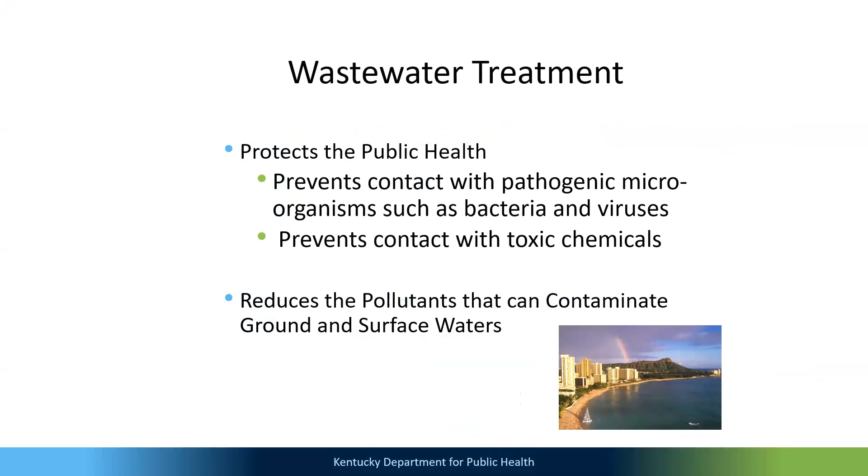Wastewater treatment protects the public health, prevents contact with pathogenic microorganisms such as bacteria and viruses, prevents contact with toxic chemicals, and reduces the pollutants that can contaminate ground and surface waters.

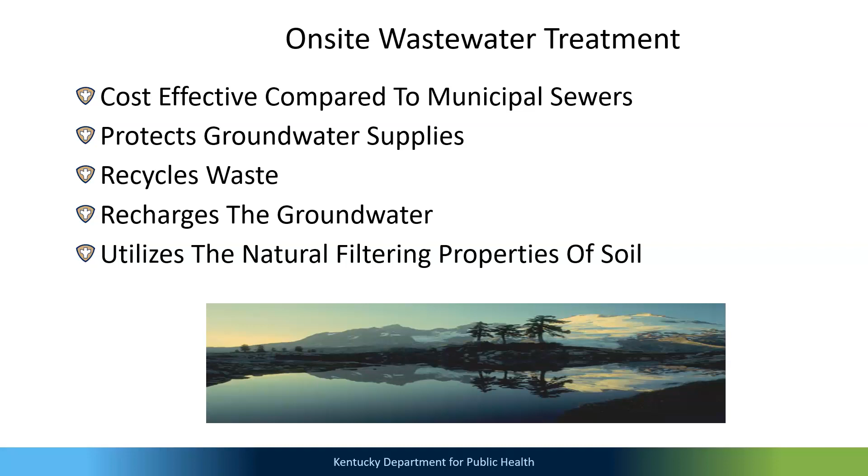On-site wastewater treatment is cost-effective compared to municipal sewers. It protects the groundwater, recycles waste, recharges the groundwater, and utilizes the natural filtering properties of the soil.

Soil consists of three types: sands, silts, and clays. The pores in between the soil are what actually absorb the water. The fluid flows through the soil pores, bacteria are filtered out, viruses are absorbed and destroyed, and chemicals are retained.

The treatment process starts with pre-treatment, or what we'd refer to as the septic tank. From the septic tank, the wastewater goes to the distribution box and then into the lateral field, where it absorbs into the soil. The soil does its natural cleaning, and then when it passes through what we refer to as a vertical separation, it's ready for the groundwater or the wells.

Each time a health department does a site evaluation, they go out and do a soil evaluation, and one of the things they're looking for is an 18-inch vertical separation, starting at the bottom of the trenches. That's what actually cleans the septic water and gets it ready for the groundwater.

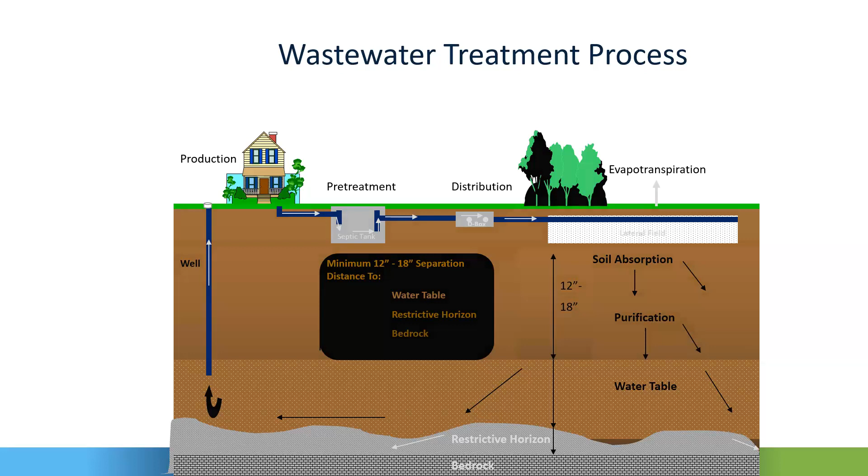Is it true that if you see a lot of cedar trees, the ground is probably good to start? No, actually if one of the visual indicators is a lot of cedar trees, it's probably real heavy clay, probably shallow bedrock, probably the opposite. That's misinformation, either that or my head.

The pre-treatment of the septic tank provides retention time of the wastewater. The system is designed so that when wastewater leaves the home and goes into the tank, that particular gallon of water is supposed to stay in there, say for 72 hours, before it goes on out to the lateral line. That's retention time to let it settle out and clear up as good as it can.

It allows separation of sludge and scum before discharge to the soil absorption system. It allows bacteria to digest solids anaerobically, producing partially clarified wastewater effluent for discharge to the soil absorption system. They have inlet baffles and tees that diffuse incoming wastewater and prevent scouring and resuspension of the solids.

It's kind of the way a septic tank is set up is this, where you see it says inlet tee and outlet tee, there's specific measurements that those have to be. On the inlet end of a tank, it's got to be 8 to 10 inches into the liquid depth. Now, what we refer to as the liquid depth would be from the bottom of the tank to the bottom of that outlet tee. That's as much water as it's supposed to be able to fill up. So that's the liquid depth, and the inlet tee has to be 8 to 10 inches into that.

And on the outlet, it's supposed to be 35 to 40% of the liquid depth. Now the thinking is the sludge layer, that's things settling, scum layer, stuff floats. That center area there where it says clear zone, that's the cleanest water that's in that tank. That's what is allowed to leave and go out to the lateral lines.

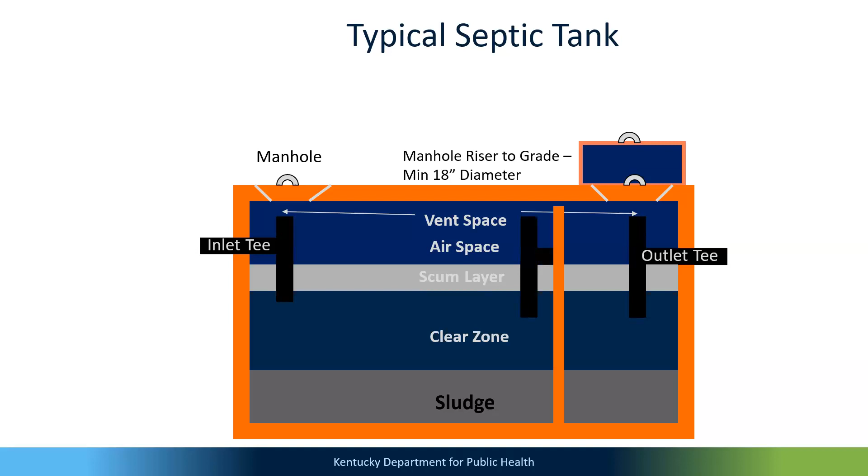That's just showing a 2-compartment tank.

Minimum septic tank requirements for a 3-bedroom or less, you got to have a 1,000-gallon tank. So even if somebody's putting a 1-bedroom rental cabin or a cabin in the woods or whatever, they're still going to be required to put a 1,000-gallon tank. And then each bedroom added past 3, you add an additional 250 gallons. Or if they've got a garbage disposal, you add another 250 gallons.

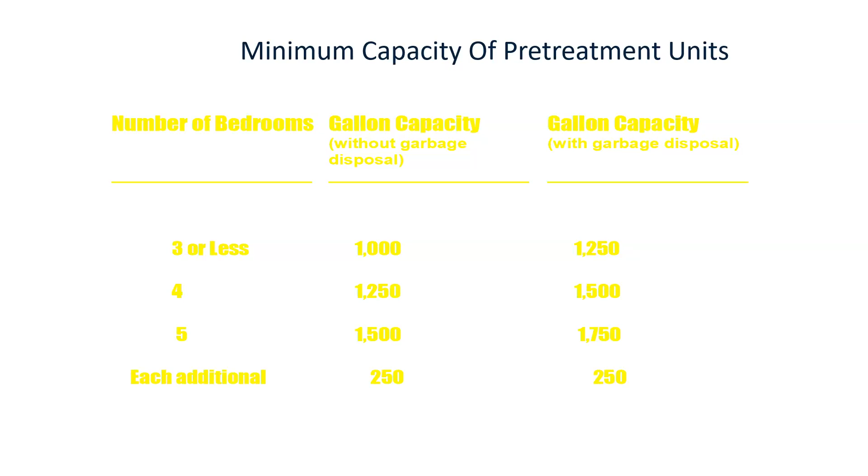The equal flow box, or the different types of distribution, one of them is the equal flow box. It's designed with a baffle. And when I say baffle, you see this - this inlet, this would be the inlet end of this distribution box, and that's the baffle right there. And what that does is actually when the wastewater comes out of the septic tank and comes into the distribution box, it slows it down.

And then it has to go down, and it comes up on this side because these are outlet holes here that actually are going to go out to the lateral lines. So it comes up slow and easy, and that way, that's why it's called an equal flow. However many lines you've got in that, the exact same amount of water goes out to each line.

And when you do an equal flow system, each line has to be the same length within 10%. You set them on a level, stable base, and we put inside those what we call speed levelers to actually adjust the water that leaves.

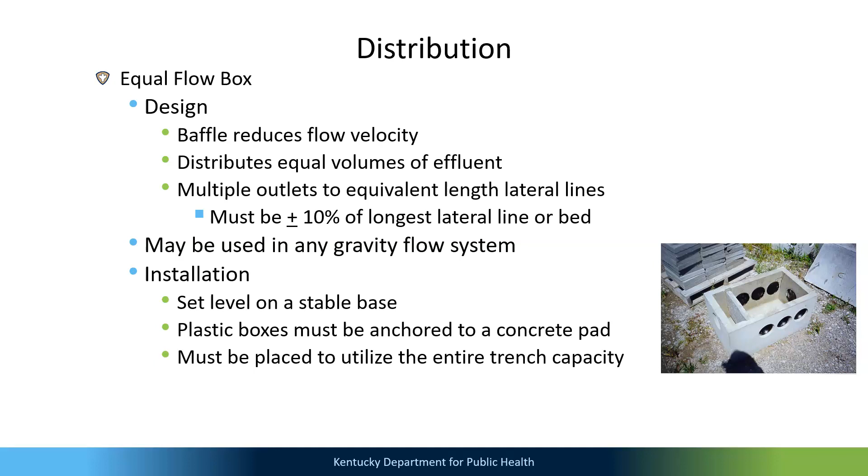Equal flow distribution, like I said, you can have several lines in that particular box. I think you could have 7, but if you needed more than 7, you could do multiple equal flow boxes for really large systems. You can get those boxes equal flow with just 3 outlets, 4 outlets, 5, 6, or 7. That's usually the way they come.

But that's kind of hard to tell on that picture. Those lines don't run downhill, they're actually level. They're running on contour. So if you took a grade shot at the end of this line right here, it's going to give you the same grade shot all the way.

So you got to run them around the contour the way the ground lays, but they got to be level. Now they don't have to be level like each one of them this way - they just got to be level within their own line. So if you're on a hill slope, this row's got to be level, and then the next row's got to be level within itself, or whatever.

Okay. Is there a volume? Is there a volume on this thing?

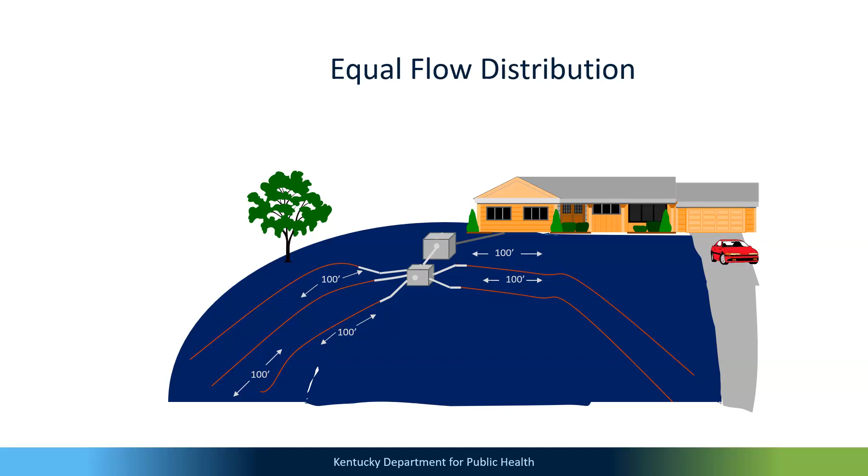I must have just had them turned off somewhere, or turned down the volume. I thought I had it great. Well, you could probably just turn it off on the TV. I don't know how loud it was down there, but up here it was loud.

Okay, equal flow placement. Notice as the lines come out of that box and go over into the trench or lateral line, you're supposed to go into the trench with a minimum of 2 feet of solid pipe, then change over to your lateral line with a hose that distributes it out. If you're using a rock trench or rock bed...

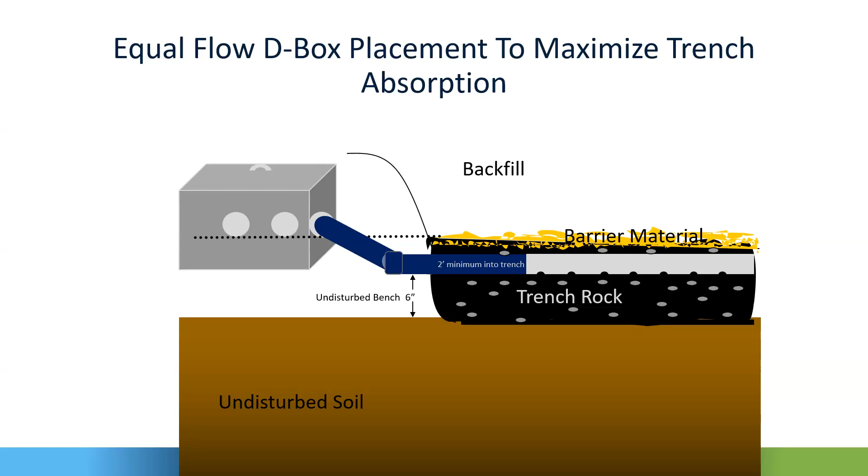The placement of the height of the box from the outlet is important, because if you get it too low, it won't back up into the box. It may pop out of the ground.

There's the speed levelers I mentioned, and sometimes after that has to be checked initially when you put the system in and it gets inspected. Later on, for a failing system, you can take that lid off, and there may be an issue, so you just take a shovel and turn those levelers around and readjust that to get it going back to equal flow.

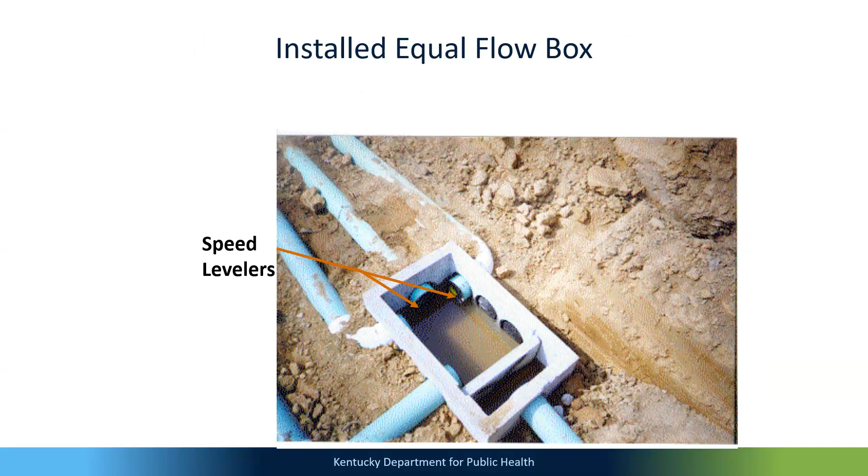A hillside box system usually has 3 outlets. The bottom of the inlet is at least 1 inch above the tops of the lateral line outlets. The bottom of the overflow outlet is level with the tops of the lateral lines. Each successive trench is filled before overflowing to the next box and trench, resulting in continuous flooding of the upper lines.

So like I said earlier on the equal flow system, all lines get the same amount. On that equal flow system, if you put 5 gallons of water in that distribution box and you've got 5 lines, they're each going to get a gallon of water all at the same time.

Well, a hillside box or hillside system works differently. They don't have to be equal lines. You can have, for instance, 100 feet running this way and 25 feet running this way. But these upper lines on the first box are going to completely fill up and actually back up into that box, then spill over the hill to the next box. They're good systems and they're used in some parts of the state.

I'm not a big fan, but they have their place. They absolutely have their place because there are some slopes and the way lots are laid out on hillsides where you can't get a flow system. But the only thing is, if these upper lines fail, the soil pores stop up and it gets all the way down to the bottom, however many tiers of land you have. Once those fail down there and come up, the system's pretty well shot.

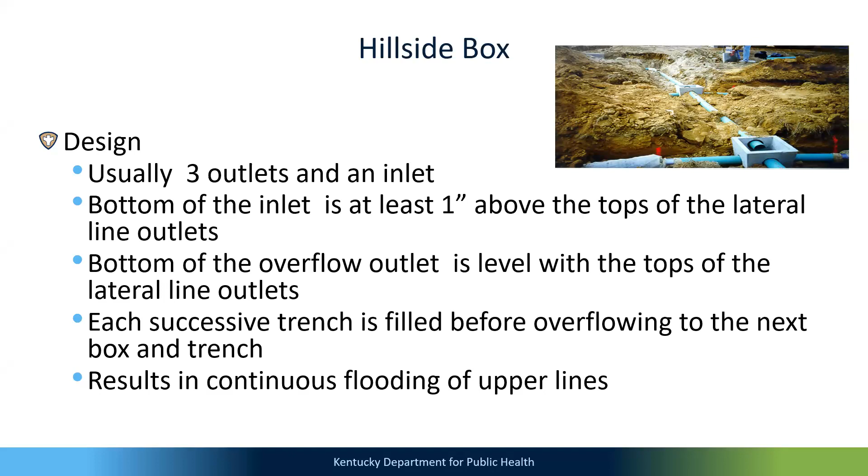So as you can see on the inlet, water flow comes in either from the septic tank or another hillside box above it, where this one's at. Then it fills up and goes to the outlet lines. Once those outlet lines fill up, the water will back up. Notice where this overflow is lower than the inlet, but higher than this, so it flows through this one down to the next hillside box.

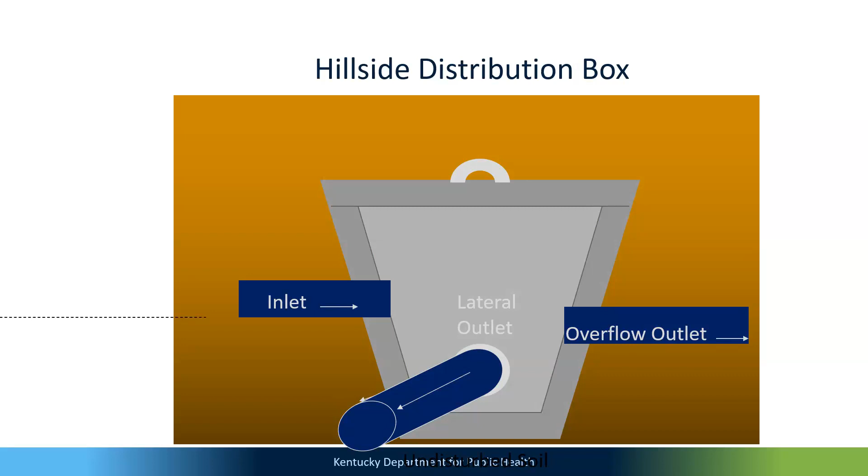Notice the difference in the lengths of the rows coming out. You can have different lengths, so you can pretty well suit the system to the lot according to the slope and how much room you've got.

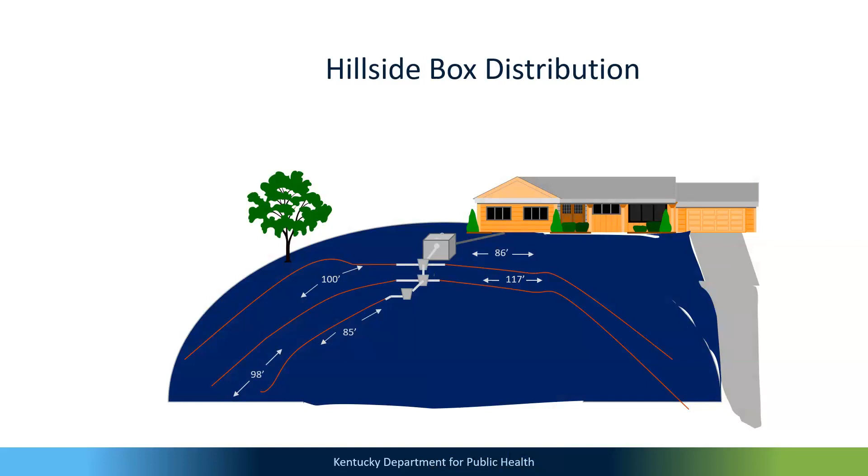Okay, hillside box use and installation. They may be used on hillsides. They may not be used in sites with group 4 soils. They don't require equivalent length lateral lines, and you install them level on a stable base.

Earlier when I mentioned the soils, all soils are either sand, silt, clay, or a mixture of sand, silt, and clay. When we do site evaluations, we decide whether that system gets installed in a group 1, 2, 3, or 4 soil, and that determines how large the system is and what components get put in.

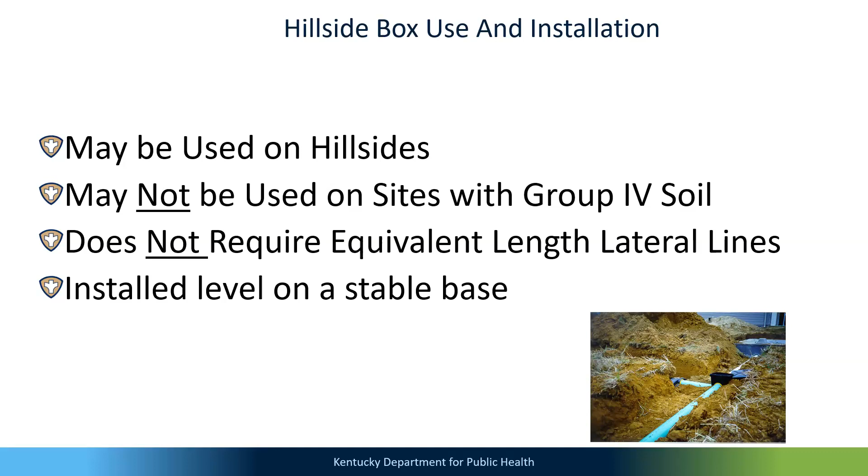Naturally, group 4 soils are heavier clay soils, and you've got to have more lateral line. Not that clay soil isn't excellent for actually cleaning up septic water, but it takes longer because the soil pores are so small, and you've got to have more storage room. So you need more lateral lines to hold it while it's soaking into the ground.

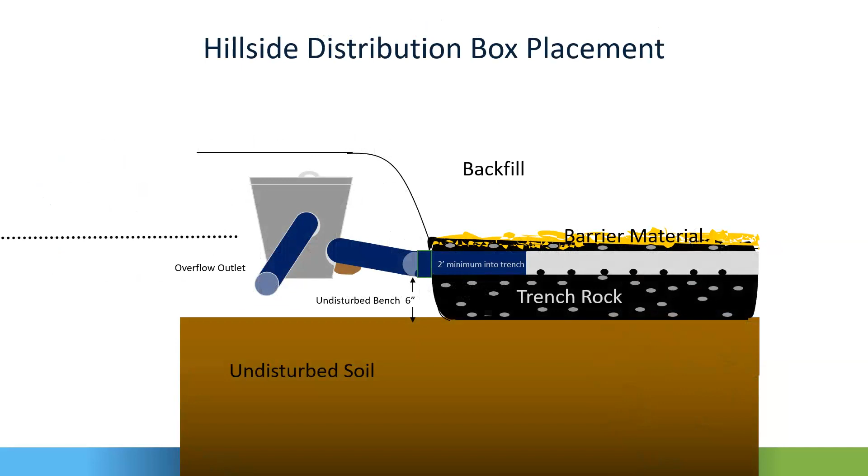The placement of the box shows how high or low it is, because if you put it too high, it may pop out of the ground before it backs up into the box. If you place it too low, that whole lateral line it's feeding may not completely be full.

These lateral lines, if we're talking about conventional rock trenches, that's the way every system gets sized originally on a 2-foot gravel trench. Then we do calculations and go from there. We'll go to either a chamber system, a rock bed system, or a chamber bed system. But the actual conventional rock trench is 2 foot wide, 12 inches of rock deep, and however many linear feet you have.

So if the box is too high, if that trench gets full of water, it may pop out of the ground and you're going to see a failure. If it's too low, it's going back into the box and spilling on over the hill before the whole 12 inches of the trench was actually full. So proper placement is really important in a hillside system.

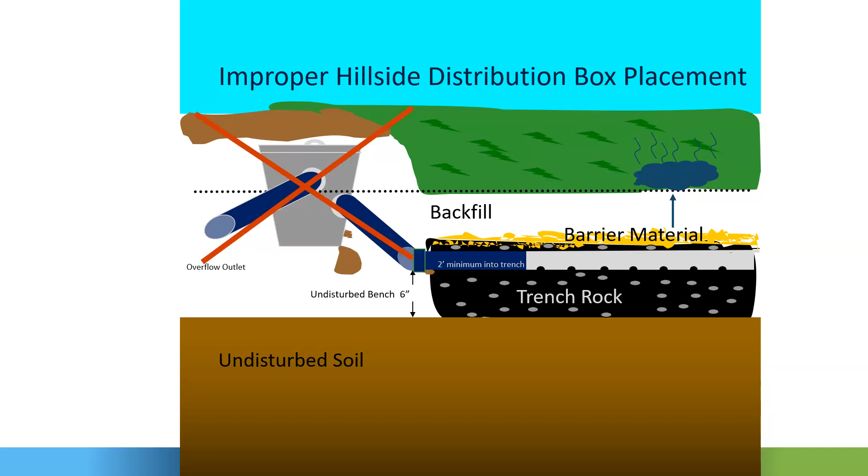The piping, non-perforated piping for gravity flow, is used for carrying effluent between the septic tanks in a series, between pretreatment units and distribution boxes, and it must extend 2 feet into the lateral trenches. We identify this as solid piping. It's in the component regs, with ASTM numbers and specifications. We can use SDR 35 and schedule 40 for septic systems, and there's another number or two we can use for some lateral lines.

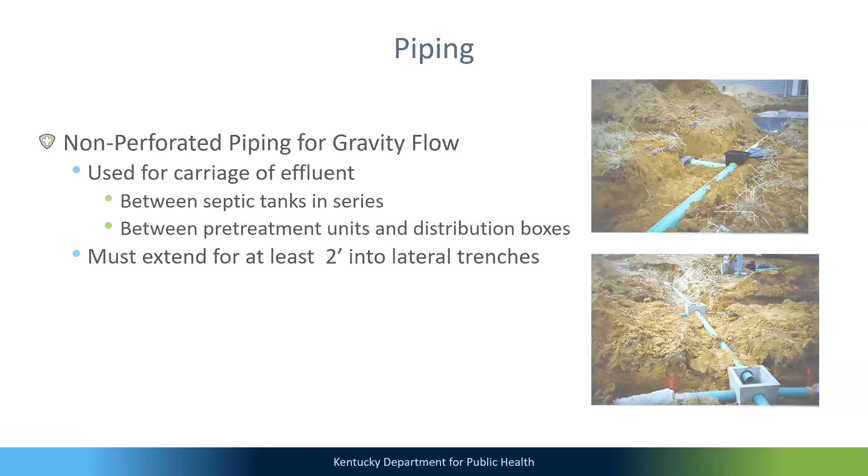Okay, leaching chambers. I don't know if everybody knows what a leaching chamber is. Those are the big black plastic things, kind of dome shaped, coming in 4 or 5 foot sections that you snap together. We've got a picture of them here in a minute. People tend to use them because they save some space on linear footage. Sometimes on small areas where you don't have room for a conventional gravel trench system, you may be able to get a chamber system in, or a chamber bed system.

They have to support 600 pounds per square foot on top. They must provide sidewall openings. They must be interlocking, provided with end plates, provided with inspection ports, and marked with the manufacturer's name and an assigned serial number.

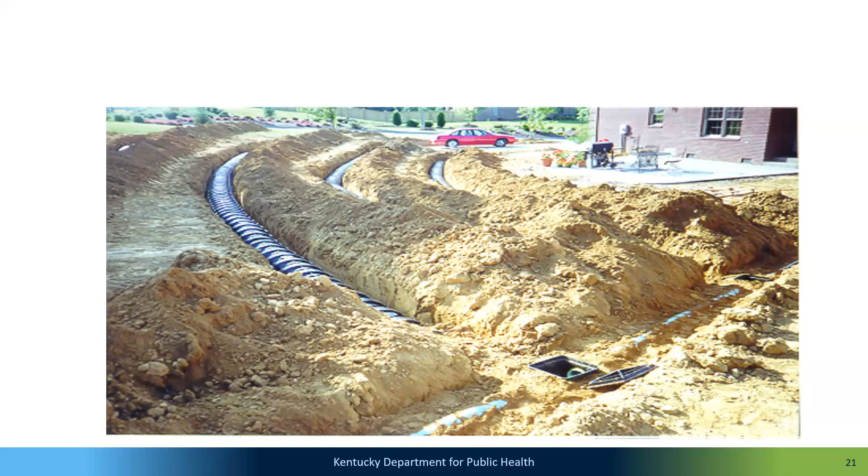And that appears to be a hillside drop system, because I'm seeing multiple boxes there. I don't know exactly where that picture came from, so... that's actually a leaching chamber bed.

Those chambers come in a single row - the single one is 3 foot wide, so we consider that a single row. But anything wider than 3 foot in chambers, we consider a bed. Those chambers come in 3 foot, 2 foot, and 1 foot widths. So you can have a 3 foot single row, or a bed anywhere from 4 foot up to 12. Regulations stop us at 12 feet - that's as wide as a bed can be, whether it's a chamber bed or a gravel bed.

Now for linear length, we can go up to 200 feet. The thing is, most people don't have room for a 200 foot consecutive single row - it's got to be broken up. And I'm personally a fan of more rows with shorter lengths. They seem to work better.

Probably 20 years ago, if you'd asked me, I'd have said - and I'm not trying to knock leaching chambers, they have their place, they're a real good product - but I was really high on them. But over the years, a good gravel bed, good 4 or 6 foot gravel bed is a hard system to beat. They're just really, you don't have to worry about people tearing them up. They're just a hard system to beat.

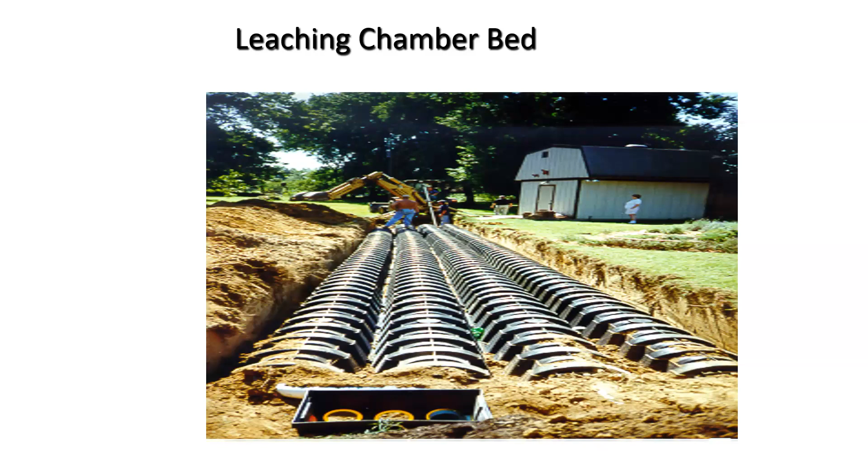You'll tend to see more chambers installed in counties that don't have rock quarries right in the same county. If the guys have to truck the rock from a county or two away, the price goes up, so they may use chambers. On the other side, you'll see more gravel beds or conventional lateral trench in counties where rock is easily available.

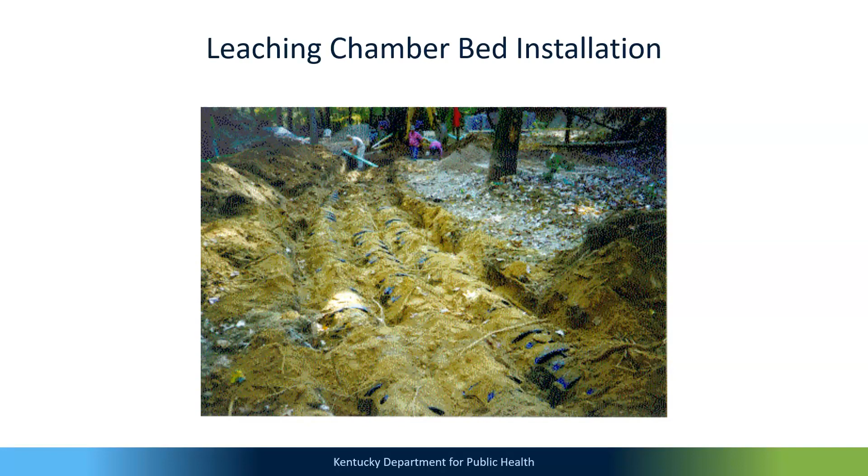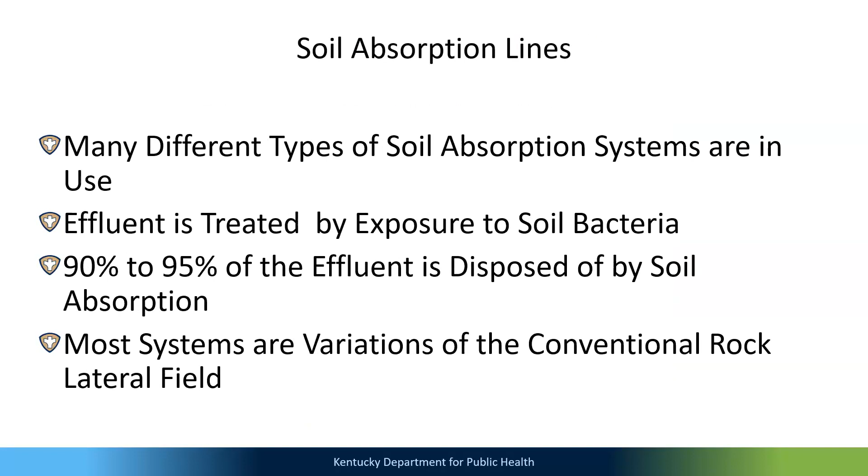Soil absorption lines - many different types of absorption systems are in use. Effluent is treated by exposure to soil bacteria. 90 to 95% of the effluent is disposed of by soil absorption. Most systems are variations of conventional rock lateral field.

The design of the conventional rock: maximum 200 feet in length, 2 foot wide, spaced 8 feet from center to center. That means if you've got multiple rows, they have to be 8 feet from the center of the rock on the first row - the next row has to be a minimum of 8 feet. That actually gets you 6 feet of solid ground in between if you go 8 feet center to center.

The maximum depth - and when I say maximum depth, we're referring to the bottom of the trench, where the gravel is put in, where the gravel meets the soil - that's 24 inches, and that's the maximum. The thinking is, if it's any more than that, there's not going to be enough air in the soil to give the wastewater proper treatment. So a high percentage of systems have to be put in less than 24 inches.

Because I mentioned earlier that we're looking for 18 inches underneath the bottom of that trench - if you go 24 inches deep for the bottom of the trench, we're needing 18 inches of good usable soil. When you add that up, that's 42 inches. That's what a health department, when they come out to do a site evaluation, is going to want to look at - 42 inches of soil. Now, if they hit some kind of restriction, like massive soil or rock before that 42, that's all they're going to get to use.

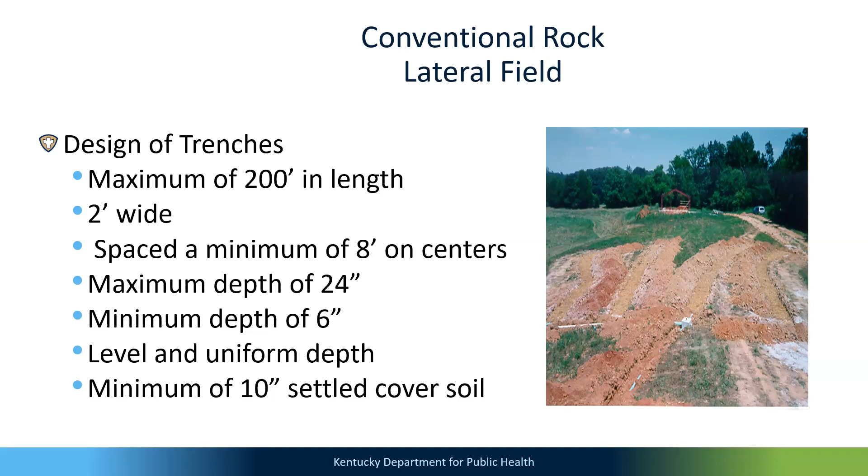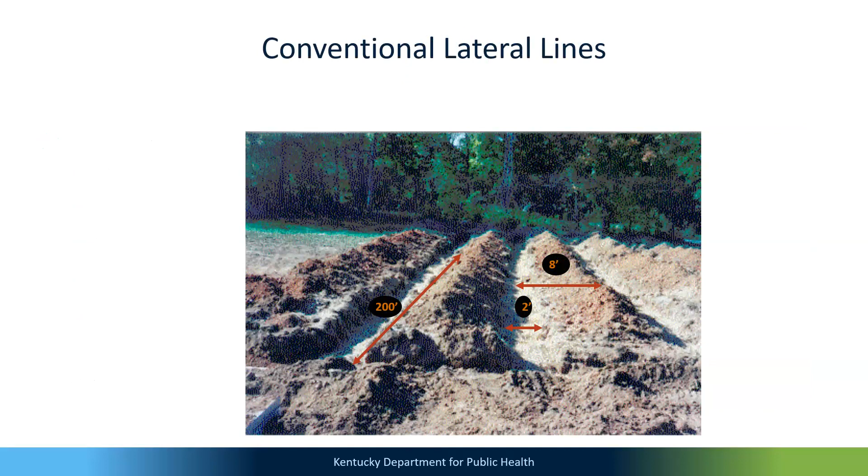That's just showing the 2 foot wide, 200 feet long, 8 feet center to center. That's showing the cross section of a lateral line. In this area here, that's 12 inches of gravel that's 24 inches wide. When these are installed, you lay down 6 inches of gravel, put your 4-inch perforated pipe on it, then put another 2 inches of gravel for a total of 12. So that pipe in the lateral line is going to be 2 inches underneath the top of the gravel. When the water comes from the distribution box into that pipe, it distributes it out into the gravel. That wastewater goes into the gravel, gets some treatment there, then starts soaking into the soil. As it filters through the soil, that's where it gets clean, ready for the groundwater.

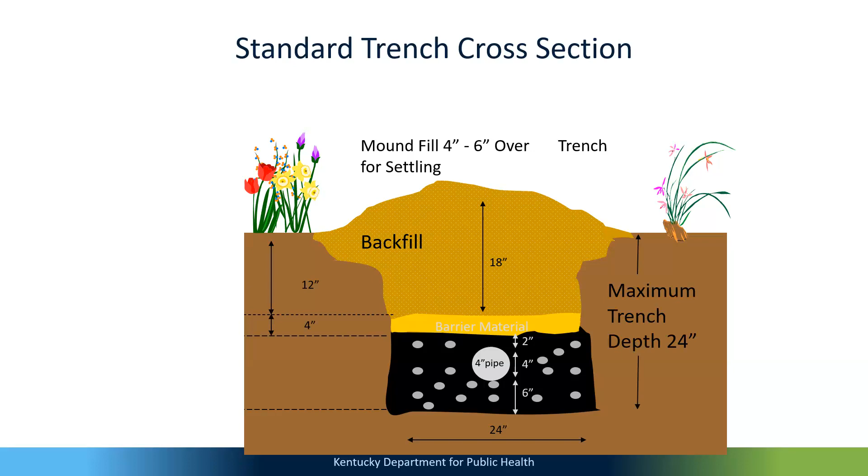That's showing that when the lines are covered over, it's good to heap them up a little bit, because if you don't, and you try to fix that dressing out right when it's done, a homeowner in a month or a few weeks will have trenches and valleys in their yard. So it's better to have it heaped up a little, since if it don't settle down, they can always drag it around a little.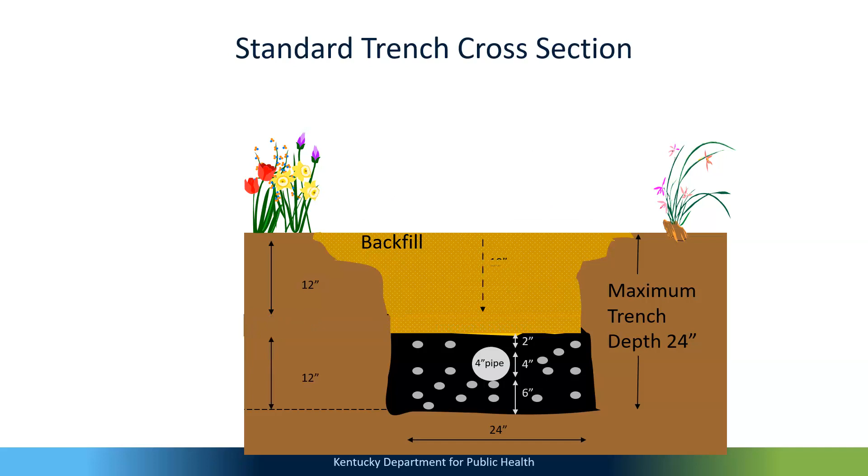That's just basically talking about the same thing I was talking about there.

The pipe coming from the distribution box actually needs to go into ground that's not loose. When this is buried, the trench going over to the lateral line just needs to be buried enough for it to set on solid ground. This needs to be undisturbed here.

And then of course that 18-inch vertical separation distance, that is the key to a septic system getting the water clean. You hear people talk about wanting a green system, and companies claim to have the greenest, newest, best thing there is. But there is no greener septic system than a regular traditional system, because what's more natural than the soil, through natural properties, cleaning the wastewater and getting it ready for the groundwater. There is nothing more natural than that.

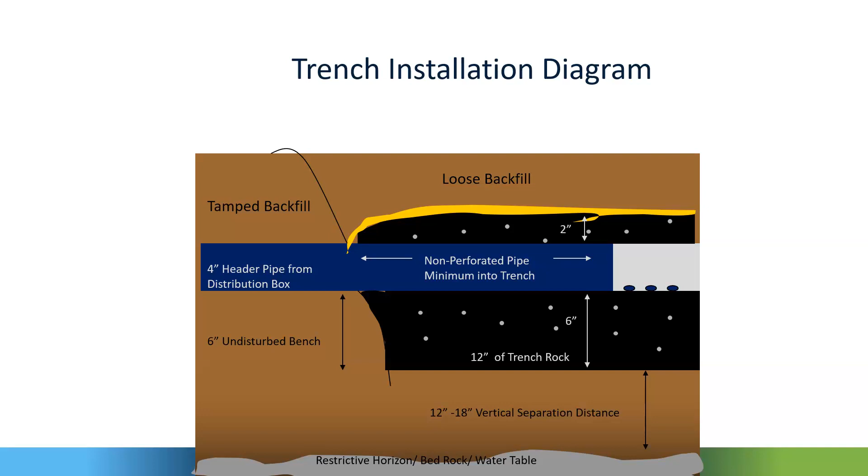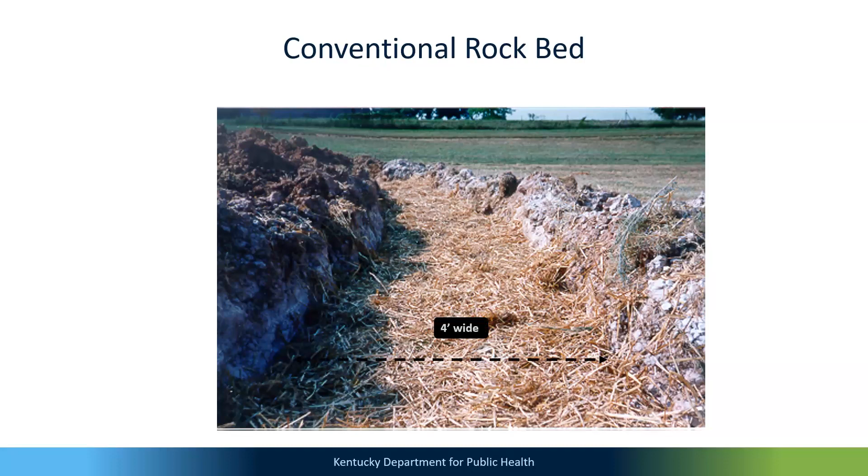Using that old bucket auger, you do a lot of guessing. Sometimes health departments will have to tell the homeowner, well, I may have to turn this site down, or it may not be as bad as I'm seeing with this auger, but if you get me some pits out here, we'll take a look at it. And if a health department goes to a site that's been altered in any way, then the regulation goes back.

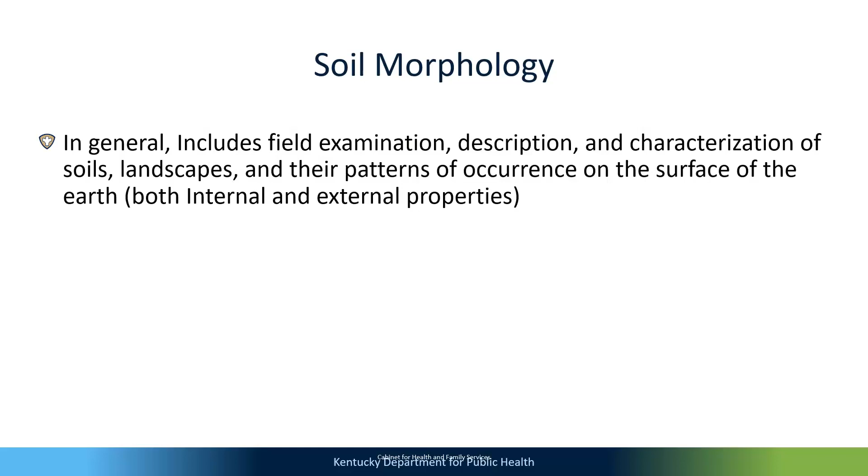Soil morphology in general includes field examination, description, and characterization of soils, landscapes, and their patterns of occurrence on the surface of the earth, both internal and external properties.

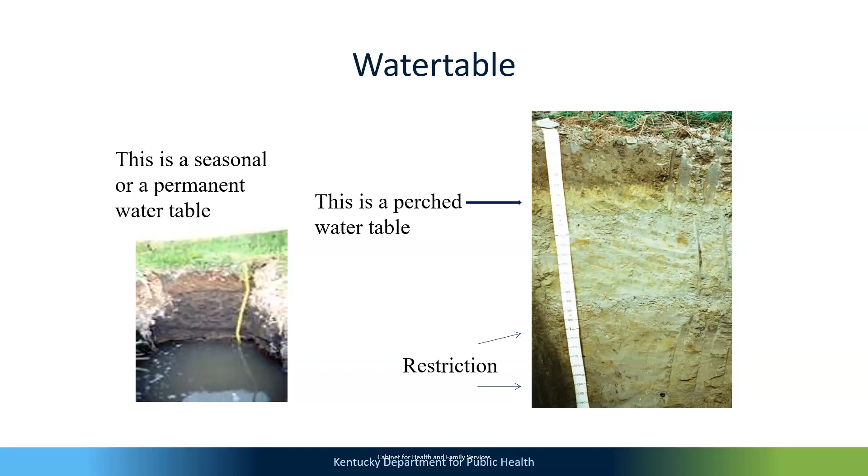Water tables, we've got an example of a seasonal or permanent water table. There are things we look at and identify to know there's a perched water table, and soil indicators called mottling of the soil. That's something health department inspectors look at during the site evaluation, and it determines the components that go in a homeowner's system, and whether or not they have to have what we refer to as a curtain drain, or can stay off of that. There's a lot of different things to that.

Hard pan is usually a clay-rich layer of soil in which soil particles are cemented together with silica, iron oxide, calcium carbonate. Hard pans do not soften when exposed to water. You can't put a septic system on a hard pan or in massive clay soil. If you do, it's going to fail. Once your lateral lines fill up, the water has nowhere to go. It's going to back up or pop out on top of the ground.

One thing when we talk about a failing system, I've heard it said often: people say, well, my system's been in for 40 years and I ain't never had a bit of trouble. Well, they probably haven't, because in their mind they're not seeing anything coming on top of the ground. But it's untelling how deep it was going, it may not be getting any treatment, it's getting into the groundwater. Well, that's a failure, but that's not a failure that they're having to look at.

That's the one with the health department inspector's job. That's one of the hardest things to do, is try to make a homeowner understand why they're having to do A, B, and C to put a septic system. It's not because that inspector's mad at them that day. It's just that's the way it is, because of the soil conditions.

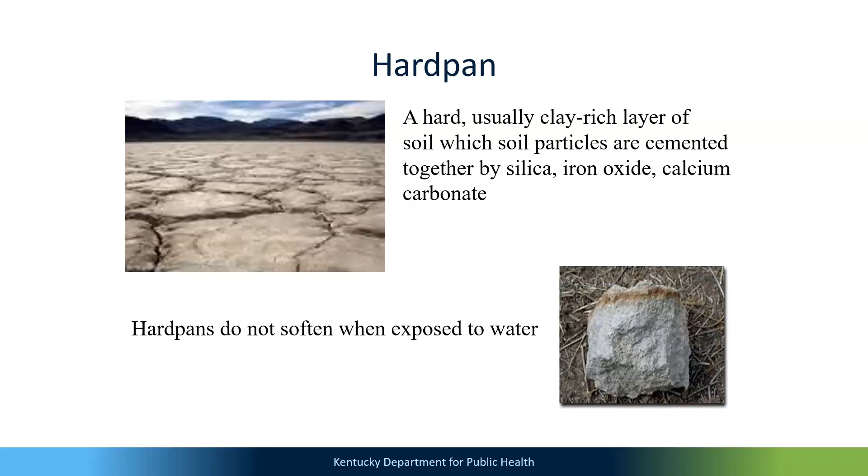Our soils in Kentucky are generally described as a natural medium for the growth of land plants, whether or not there has been development of soil horizons. Each soil profile is an end product of the action of several factors, including climate, living organisms mainly vegetation, topography or lay of the land, parent material, and time.

The results of the action of the first four factors over a period of time determine the kind of soil at any one place. In Kentucky, almost all soils except stream deposits may develop under forest cover and essentially the same climate. Therefore, the resulting differences among soils are due chiefly to differences in parent material, topography, and the length of time they've been exposed to weathering and the soil forming process.

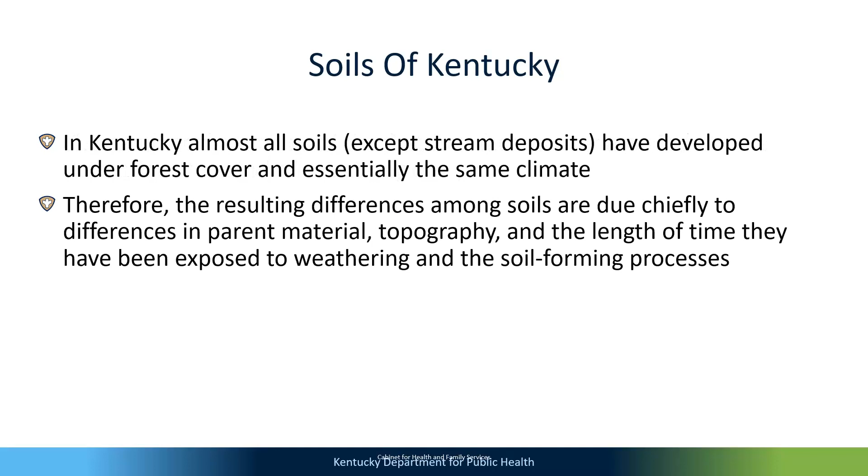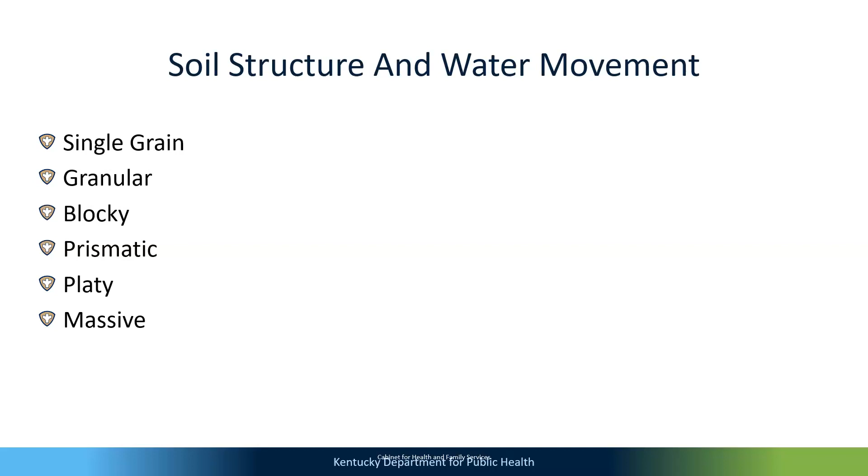Soil structure and water movement. When we talk about soil structure, we refer to it as single grain, granular, blocky, prismatic, platy, or massive.

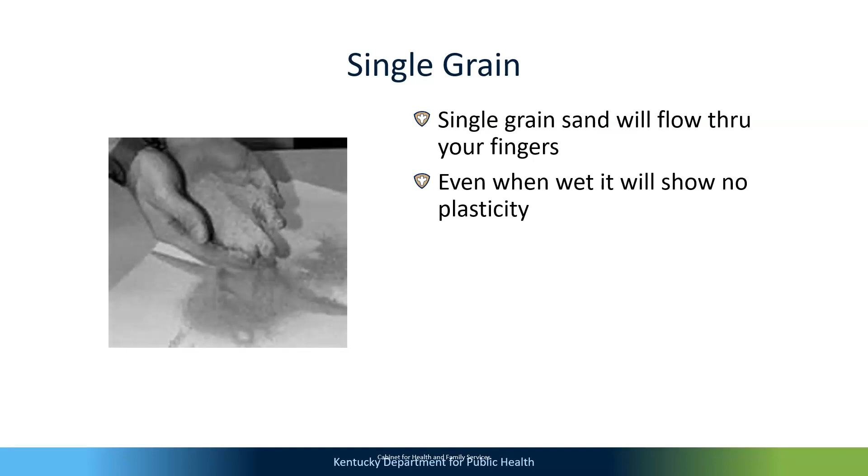Single grain sand will flow through your fingers, even when wet. I like to think of single grain sand - if you go to the beach and pick up some sand, crack your fingers a little bit, and sand just goes filtering through, falling through. We don't want that for a septic system. Because if you think about it, when that wastewater comes out of those lateral lines and hits material like that, it just falls through and it doesn't get any treatment. So we don't do a lot of site evaluations in single grain sands.

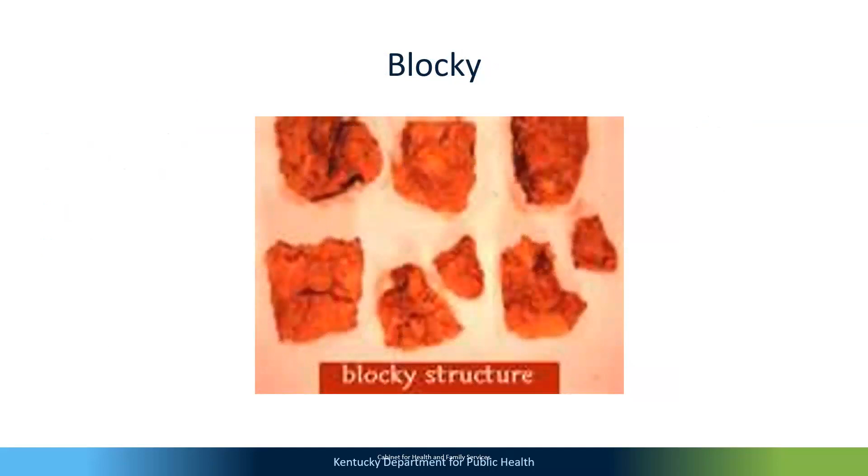Granular structure is dark in color due to the high organic matter found in surface horizons, usually very permeable and porous, subjected to most weathering. That's an example of granular soil - you see it's just little small beads. Blocky would be larger in size, some of it clumped together. That's an example of granular, and that would be probably small blocky and then maybe larger blocky. We're just going to call it blocky.

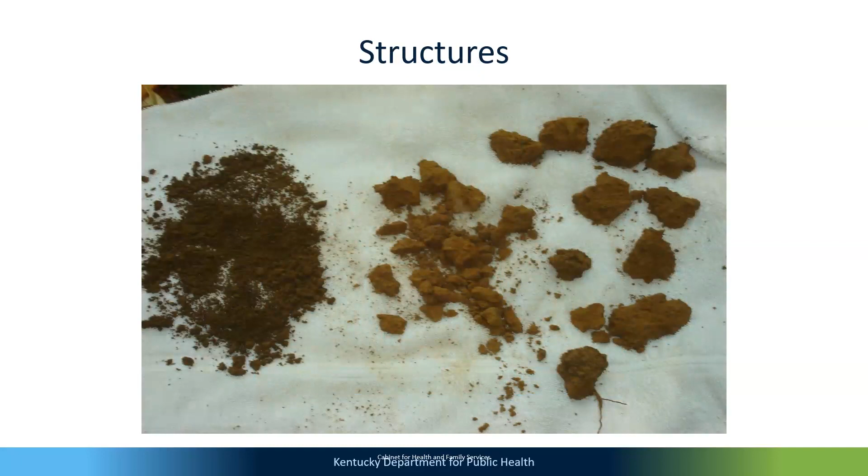So we treat that as a restrictive horizon, and we've got to deal with it. We've got to stay off of it or whatever.

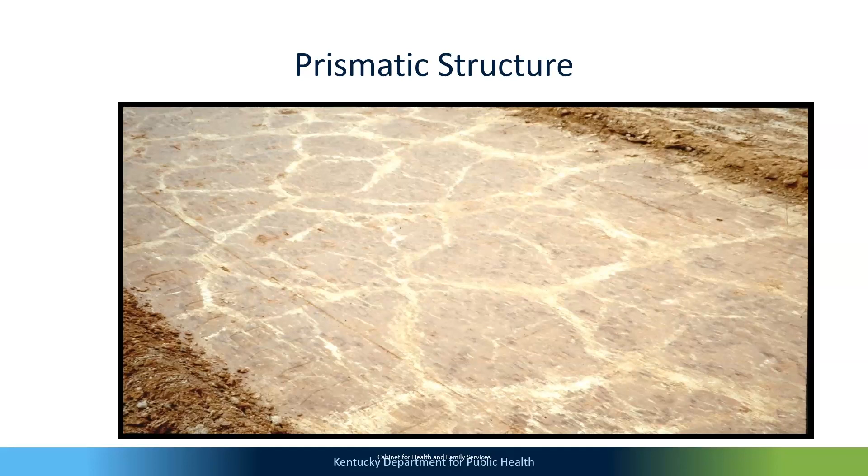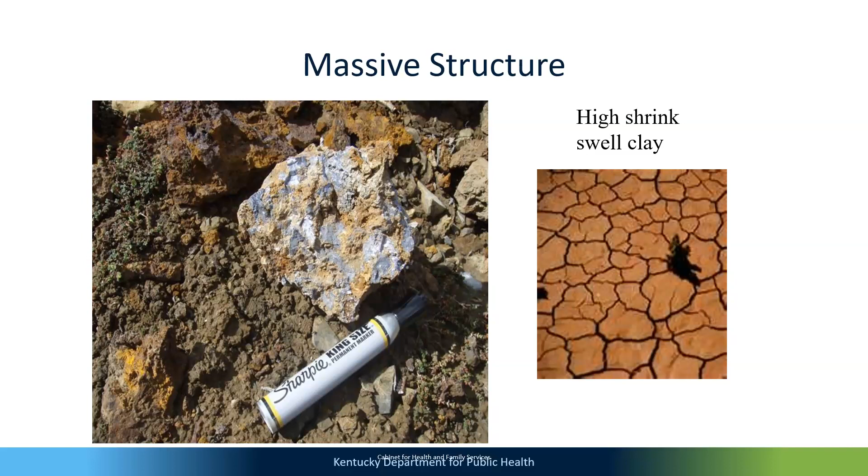Massive soils are found mostly in high clay content soils in the lower horizons, restricting downward water movement. You've probably all seen some massive soil, just big chunks. Massive soil just doesn't soak up the water, or if it soaks up any, it's such a small amount at a slow period of time that it just doesn't work for septic systems. The high shrink-swell clay - that's another one, that's a no when it comes to septic systems. Just some other examples of massive.

So we do have some areas where their site evaluation may be done, and maybe there's a little massive or compaction on top - say for instance, some hay fields have been mowed year after year. There may just be a little massive soil there. In our regulations, there's actually things we can do to take care of that, as long as it's not too deep, without having to turn that site down.

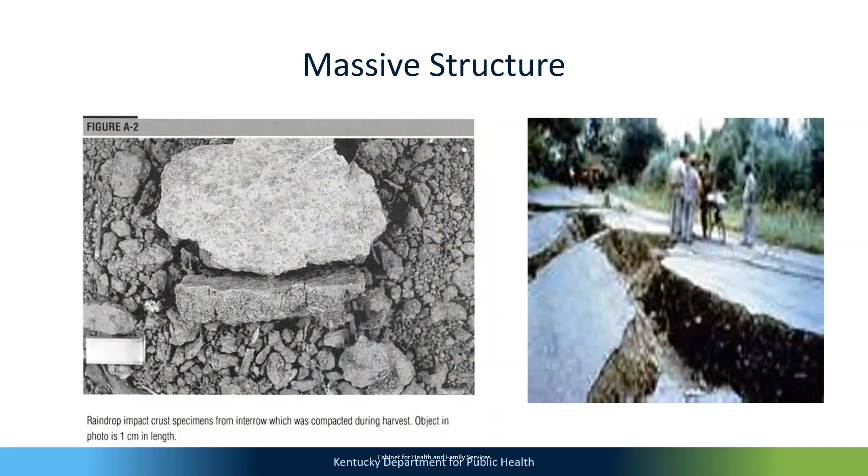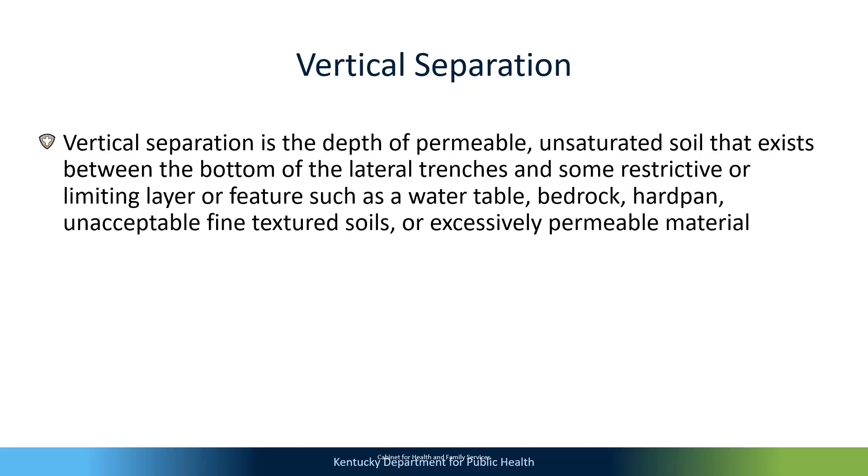Restrictive horizon - Kentucky regulations try to maintain an 18-inch vertical separation distance from the bottom of the lateral bed to the top of any restrictive horizon. A 12 to 17 inch separation distance may be used, though I don't even like to talk about that, because if I can get an 18-inch vertical separation, that's what I want, since that's going to clean the water better. But if a health department has to go to that, there are additional things they can require on that system to make up the difference.

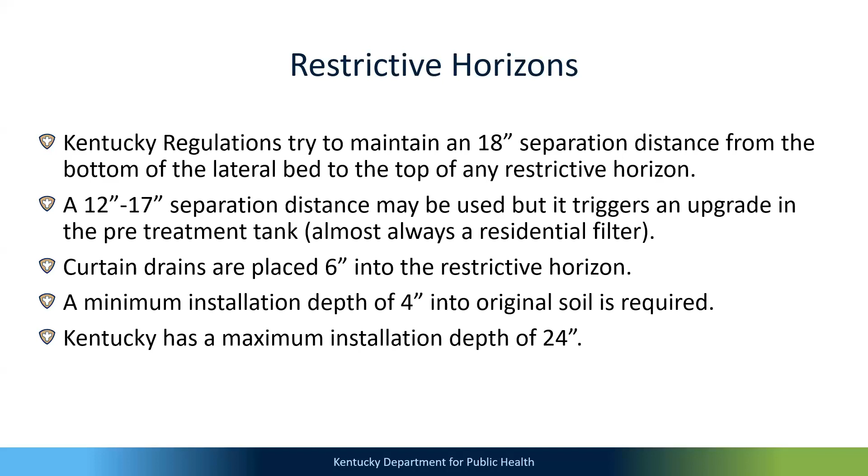Talked a little bit about curtain drains, and I'm trying not to get too far off on state and local on-site rules. The state staff, which is what I do, and Krista - she works the south central area. Well, I should have introduced you a while ago. Actually, I didn't even see you until we got started, but anyway.

We do second opinions, problem sites, help out health departments when we can, or homeowners. If a homeowner calls and says, I don't like what the health department's done, can you give me a second opinion? Yeah, we can, we do. I don't like to do that, and I go along with whatever the health department says, unless they maybe didn't go to a certain area or missed something. But the one enjoyable part of my job is when somebody calls and says they need help, maybe a lot too small or bad soil conditions or something, and I can go out and spend a day and actually figure out a way that homeowner can get assistance.

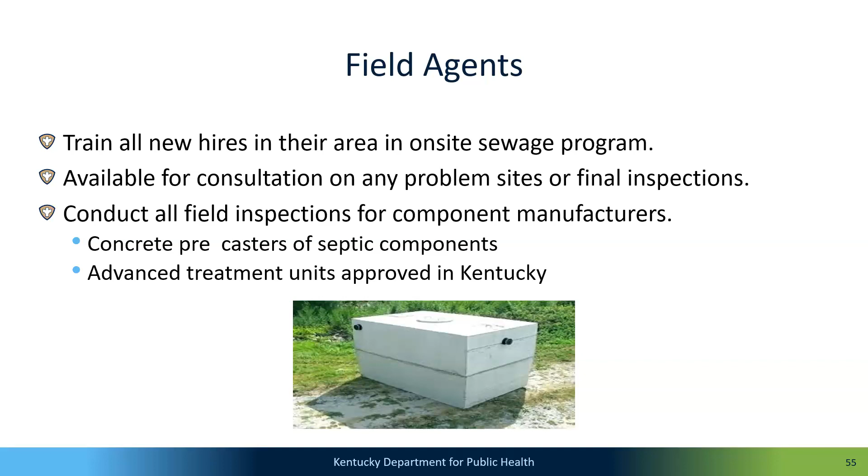We conduct field inspections for component manufacturers, that's the concrete precasters, all the advanced treatment units. We review new components, we develop the annual installer trainings. We serve as members of environmental strike team, plan review, available for questions, serve as hearing officers, problem solving for citizen complaints, and many more.

Where the local health department, that's who you're going to go to when somebody needs a septic system put in, and fill out a site application and get a site evaluation done. Once they get the site evaluation, a homeowner will hire an installer, or talk it over with the installer and they get hired. Eventually, when the installer gets a permit, the health department inspector will tell them to go ahead and put it in. Then when the installer gets it in, they'll call the inspector and say, I need a final approval, and he'll come out and go through all these things that we talked about.

The finals, they do complaint investigations and legal proceedings. I don't want to make it sound like that's shortchanging what they do, because the health departments do.

How many programs do y'all do? 10 or 12? Yeah, I mean, I only do on-site, that's all I do. And you all wear a lot of hats. Just the on-site alone, if you're in a county that's doing any building or anything, it gets crazy.